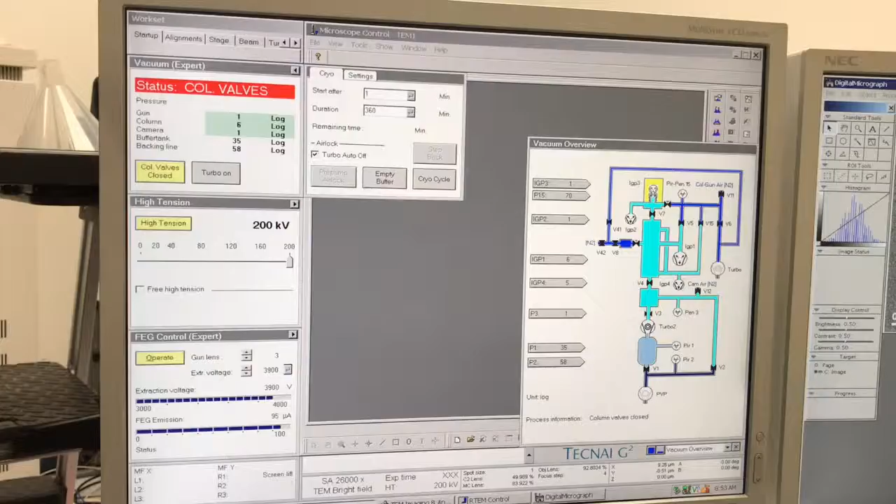So I wanted to make a video specifically covering alignment of the gun. If you've watched the video I did on basic operation of the instrument, I talked about how as part of starting the session you can apply gun alignments that have already been saved.

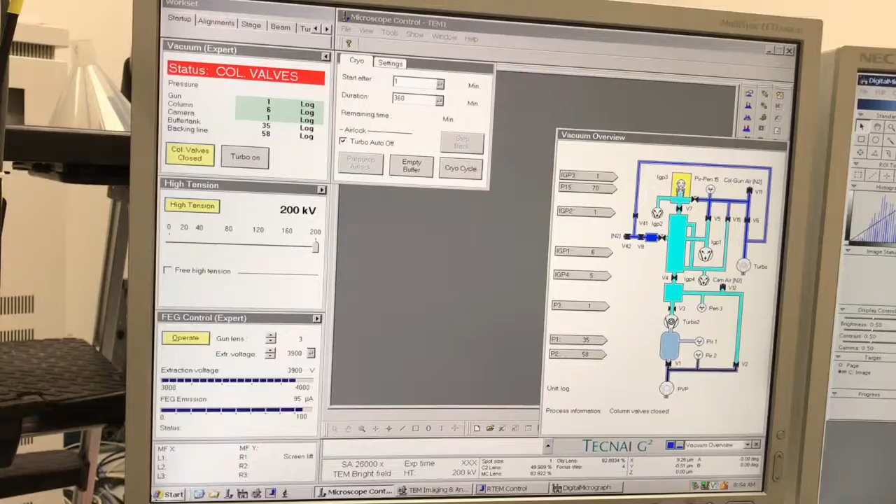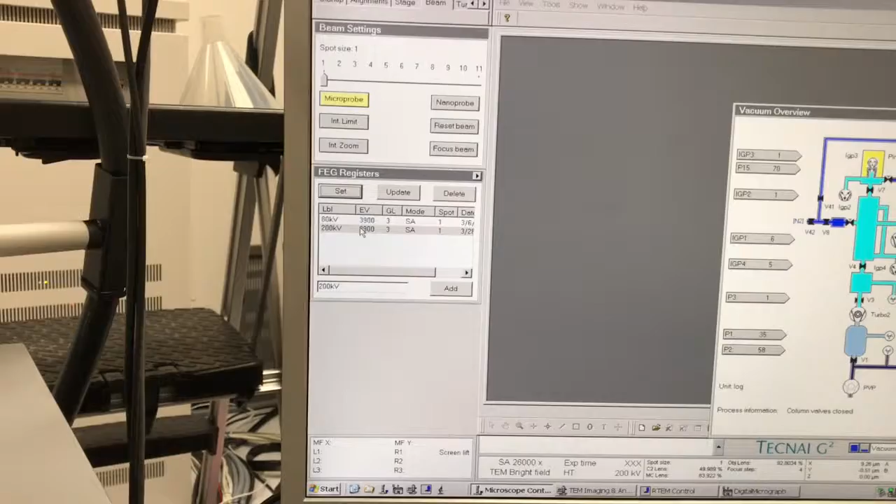So if you recall, come up here, go to the beam tab. Down here in FEG registers, you can apply gun alignments that have been saved. And I didn't really go over what exactly is entailed in doing the alignments. Okay, so I'm going to go over that as well as how to save them so that they can be recalled later.

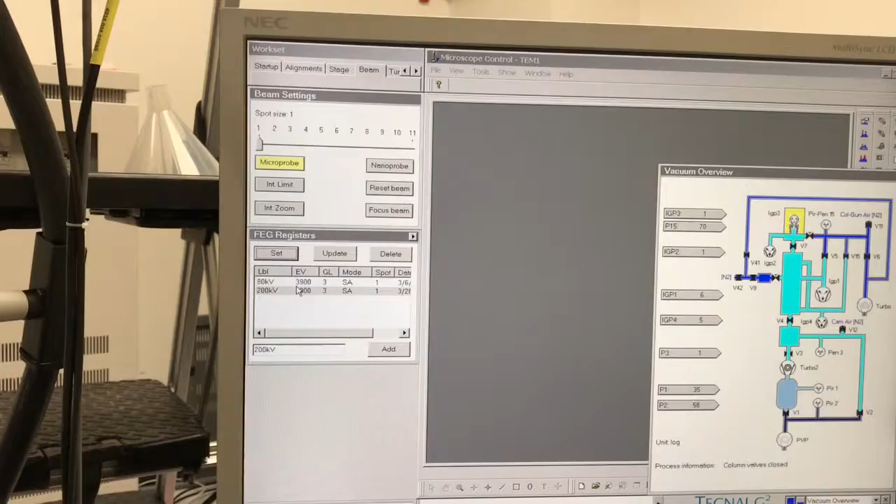So it's been my experience with the Tecnai instruments that the gun alignments are very stable and don't usually need to be done very frequently. It's usually once every 1 or 2 months I will check them to make sure that they look okay, and usually they don't need much adjusting if at all, and then I will just update the alignment and save it, so then any user who comes in can just apply the alignment and doesn't have to worry about doing the gun alignment manually.

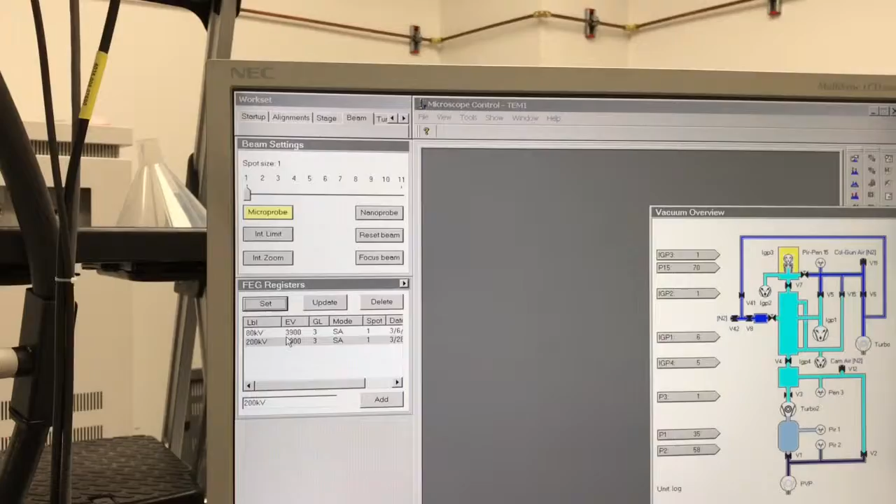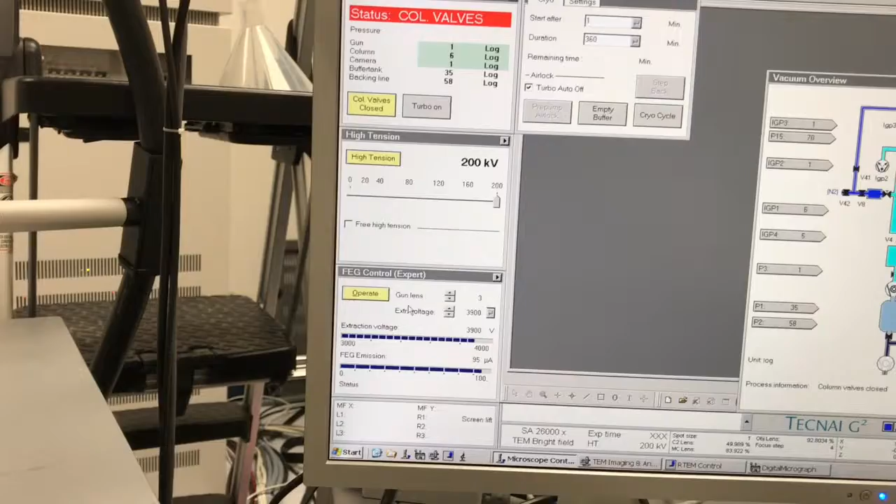So if we come back to the startup tab right here, okay, down here in high tension and FEG control, there's two really important parameters. Actually, I should say maybe three. One obviously is the high tension or the voltage, and then in FEG control there's what's called the gun lens and the extractor voltage. So your gun alignment is going to depend on all three of these parameters.

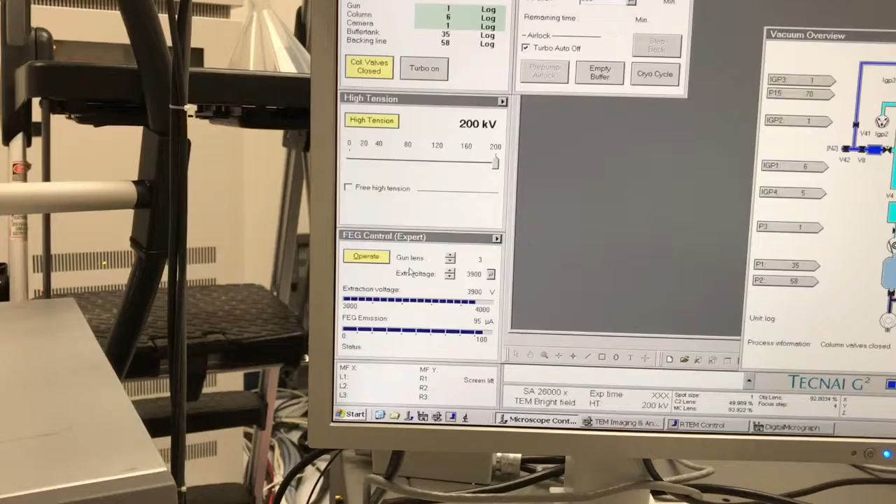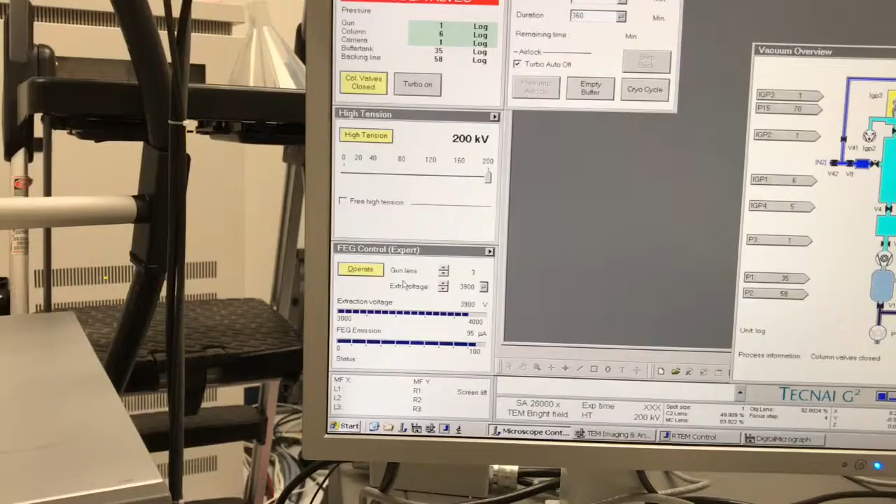Generally speaking, when you're operating the instrument, you're going to be running your extractor voltage at basically a preset value, irrespective of the high tension or the gun lens. Not to say that you couldn't necessarily alter that somewhat, but generally speaking, that value is kind of preset for operation at any voltage or gun lens. What you have more control over as a user are the high tension and the gun lens.

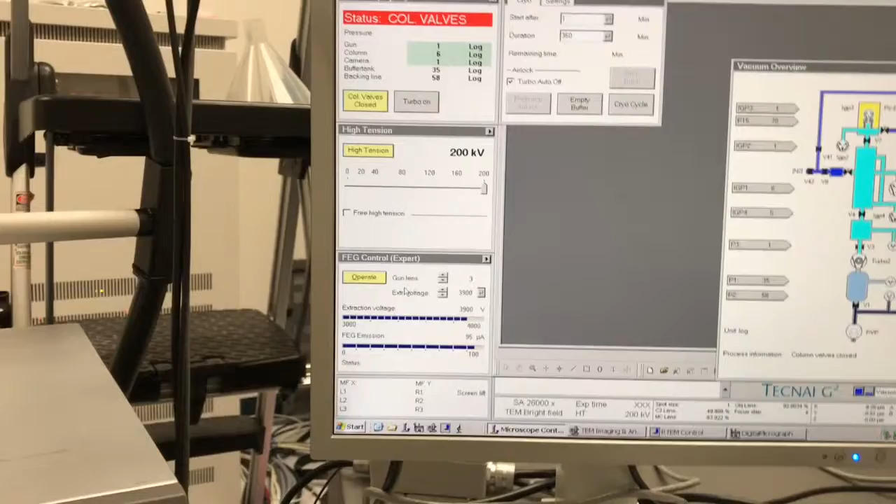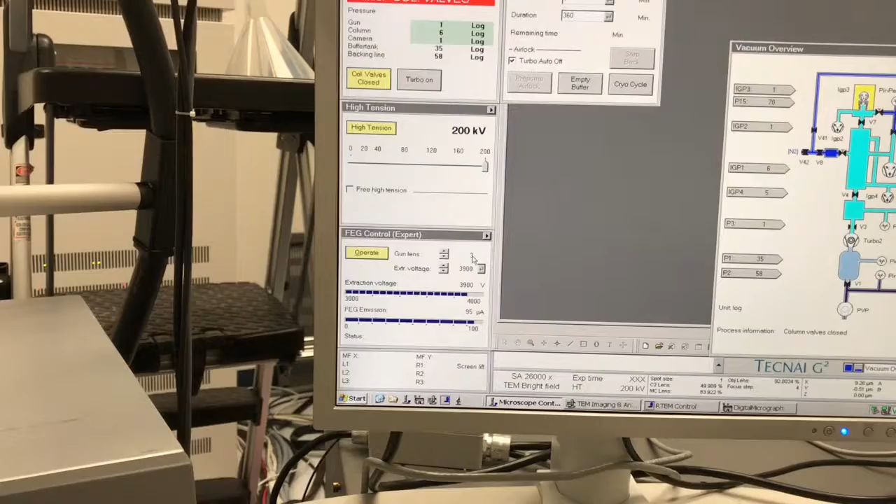So the high tension, obviously, that's the voltage that's applied to the electrons, the accelerating voltage. The gun lens, however, is something different. So that's actually a lens in the gun that provides a focusing action. And that has numerical values. I think this goes from like 1 to, I'm not sure what the upper number is. It might be like 7 or 8, I'm not sure.

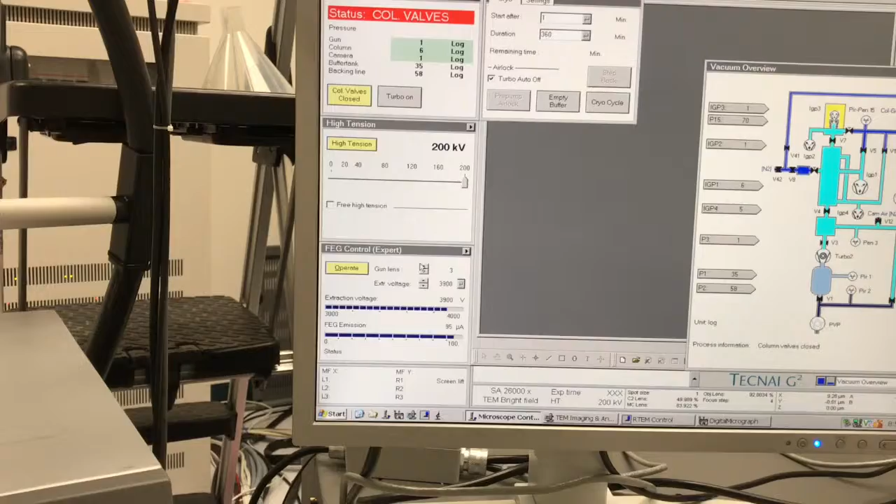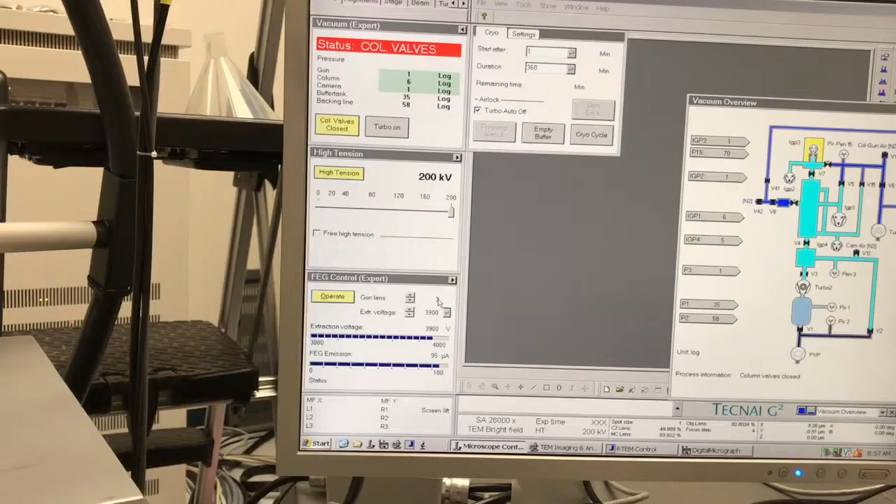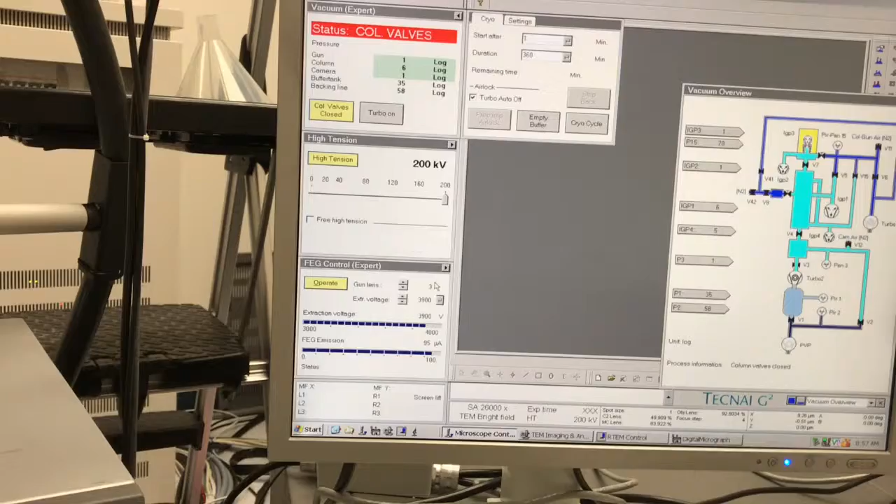The basic idea though behind the gun lens is if I go lower in numerical value, I end up with a smaller demagnification of the gun. And concomitantly, I end up with more current in the beam reaching the sample. So it's very much analogous. The gun lens is analogous to numerical spot size. If I increase this value, I get more demagnification of the gun, which in principle means I can get a smaller beam size on the sample, but I end up with less current in the beam reaching the sample.

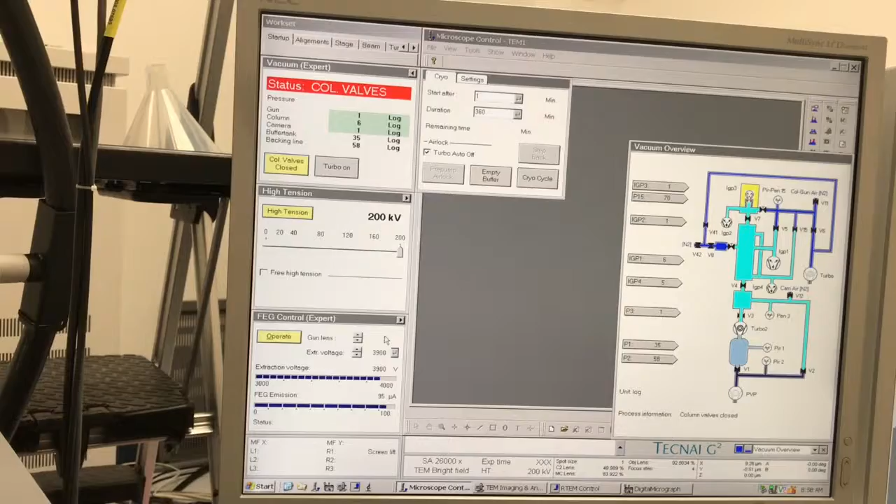What's interesting about this though is I have not personally, at least on this instrument, seen a huge difference in changing the gun lens value up from this and getting a smaller probe size. I do see the change in beam current, but I haven't empirically observed a noticeable difference in the smallest possible beam size as a result of changing the gun lens.

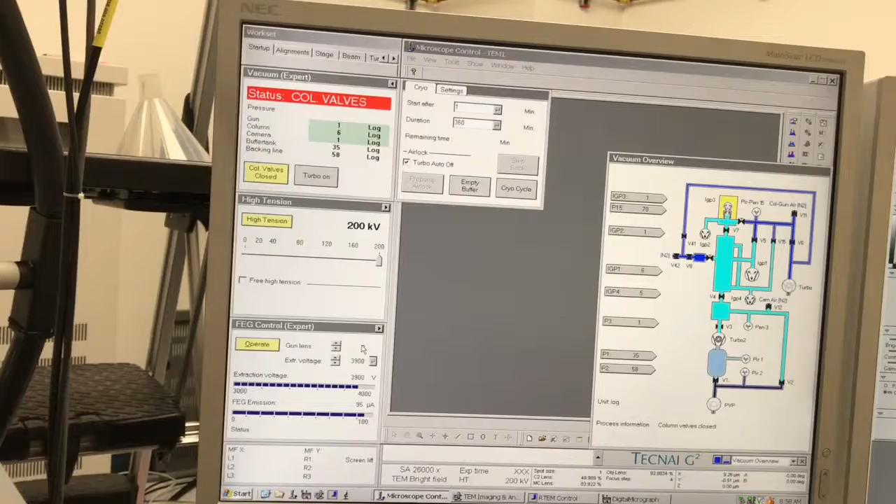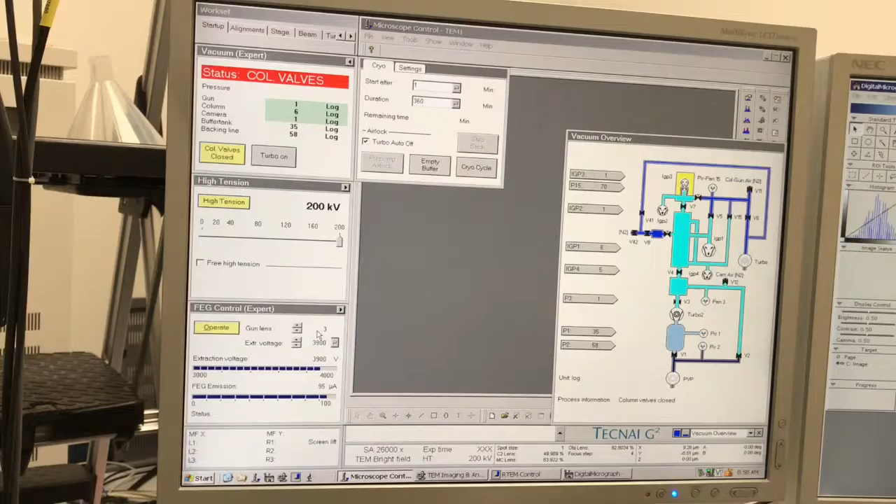So if you're not really getting a benefit in terms of smaller probe size, like if you were doing, say, atomic res STEM, by going to a higher gun lens and you're losing current, there's really very little reason to use a higher value of gun lens than is necessary. Gun lens 3 is what's recommended by the manufacturer just for general operation. So that's what I leave it at.

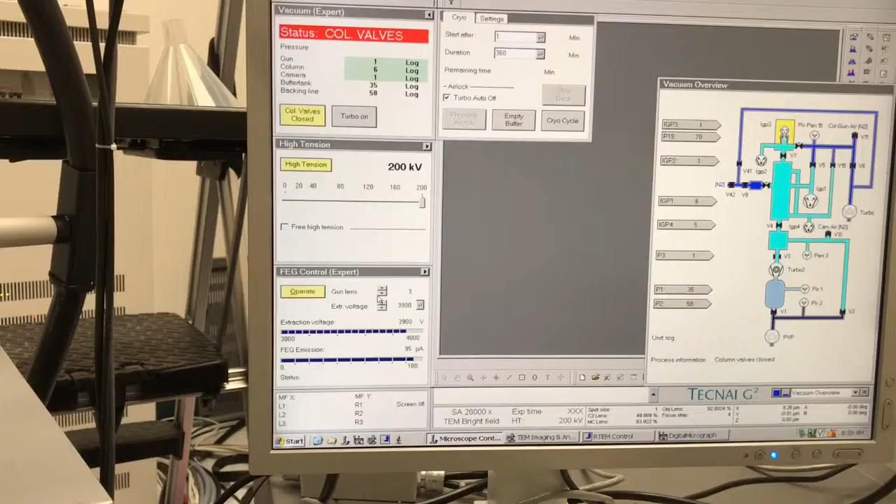But anyway, the takeaway here is your gun alignment will depend on what is your high tension and what is your gun lens. So for general operation, we use 200 kilovolts and we use gun lens 3. We do have an alignment set up for 80 kilovolts, which I'll show you later, if this was being used at a different voltage. So that's the first thing you need to know about doing the gun alignment.

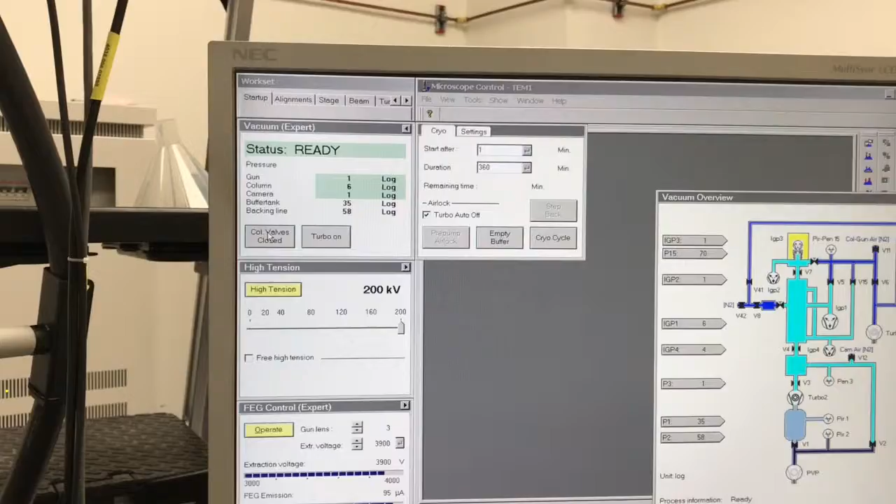Okay, so the actual gun alignment then. I'm in startup here and I've opened up the column valves. So if we come to the screen here, you can see that I've got a beam. I don't have a sample in right now. That's ideal for when you're doing this. You don't have anything blocking the beam.

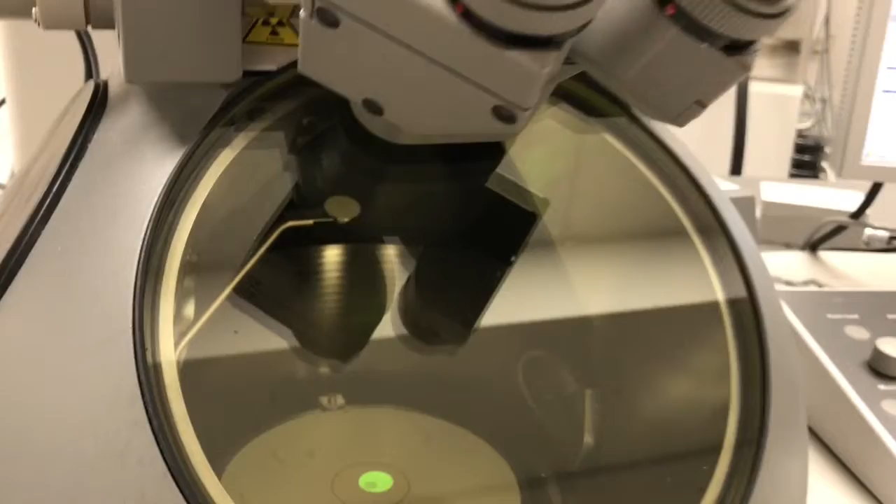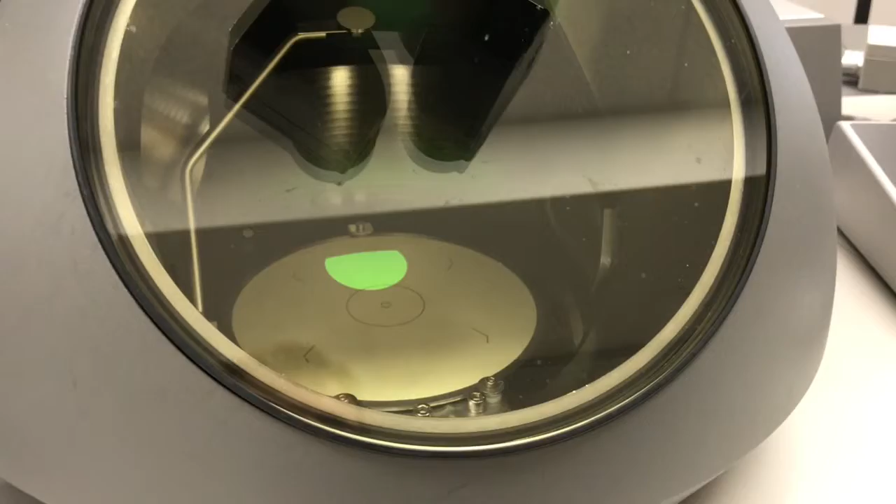So first thing we need to do is change our C2 aperture. So for general operation, this is set here at number 2. I'm going to increase this to 4. Okay, and now the first thing I have to do is realign the C2 aperture. So I'm in SA mode. You can see here you want to be in SA mode when you're doing this.

Okay, and if you recall the procedure, go to crossover, expand clockwise, come back up here, adjust your aperture shifting screws here to recenter the beam. And we'll do a couple iterations of this. Okay, I have a little bit bigger than that 4mm circle, expand it. That actually looks pretty good right there, so I'm not going to do another iteration. Okay, so that is the first part of this.

I'm also at spot size 1. I like to do this at spot size 1 just because, generally speaking, that's what you're using when you're doing most conventional imaging. Although the gun alignment shouldn't matter, it makes it easier to do if you're using spot size 1 because you have the most current possible reaching the specimen.

Okay, so I increased my effective magnification substantially, or my indicated I should say. I'm still in SA mode, but I'm up to 175,000x. Okay, and what I want you to watch here, so I'm adjusting the C2 control, and you notice the beam isn't perfectly centered. There's a reason for that. This is going to be easier for you to see. As I go to crossover, close to it, you see inside the beam there's a bright spot.

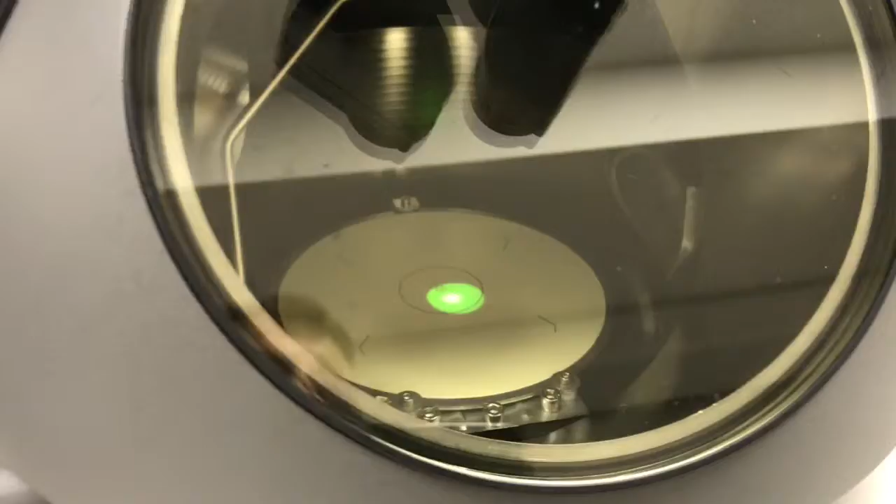Come to the Tune tab, click on Gun Tilt. Okay, your multifunction knobs are now activated for gun tilt. With the gun tilt, I find that you want to bottom out the sensitivity with these because it is very sensitive otherwise. Okay, and now it's literally, you're adjusting to get that bright spot centered inside of that illuminated area. Okay, so actually that looks a little bit better.

If I throw it off, okay, so now I'm not centered anymore. You notice the beam is kind of moving around a little bit. That's not really problematic. If you need to shift it back, use the trackball, obviously. I'm only adjusting the X multifunction, so I can go ahead and try the Y here. Alright, so you can see that's a little bit off. You may need to periodically, yeah, so that's off there. But just adjust your C2 control.

Alright, so that's actually pretty good right there. Again, it's a little hard to see. I would normally do this with it centered, but if I shift it off so it's not over the circle, it's easier for you to see on the camera. Whoops. And so that's off. Okay, that looks pretty good right there. Okay, I've got that bright spot centered. So I really didn't have to make a whole lot of adjustment to this, but I did make a little bit of one.

The other thing that may happen when you're doing this is you may have to adjust your condenser stigmators. So the condenser astigmatism isn't really off by a whole lot, but again, if I wanted to adjust that, I'll go ahead and hit done here. I'm in the Tune tab, select condenser, and my multi-function knobs are now activated for that. Okay, and so actually, when you have the number 4 aperture in, your beam is not going to be perfectly circular, even when you have your astigmatism of the condensers corrected. It's going to actually kind of have a little bit of a triangle appearance, which is normal.

Okay, so that's actually normal right there, and now it's not. Again, the litmus test is it has to look symmetrical when you go back and forth through crossover. Does it expand with the same shape? So it's still probably a little bit off. But not too much. Okay. So that's the first part of this, is the gun tilt. And the next thing we're going to talk about is the other part of the gun alignment, which is the gun shift.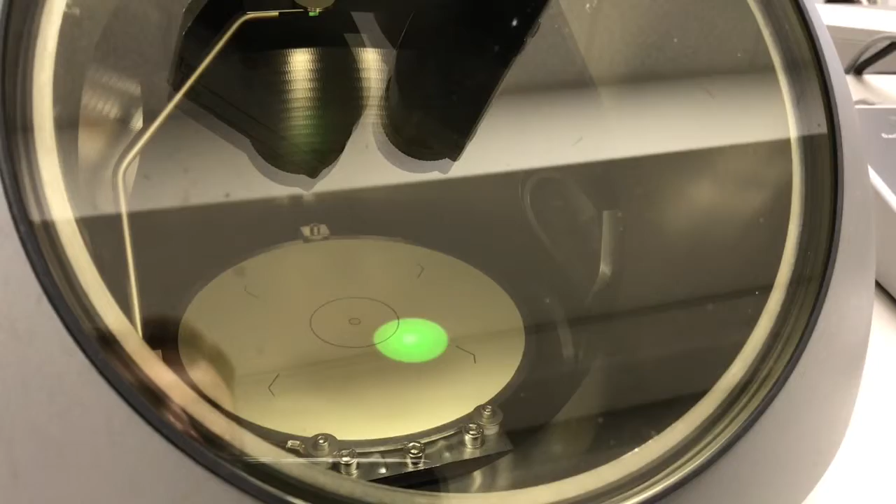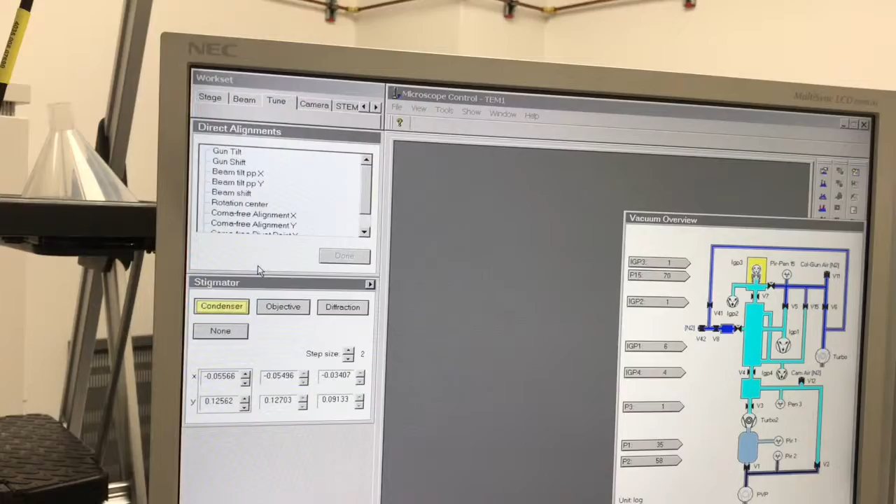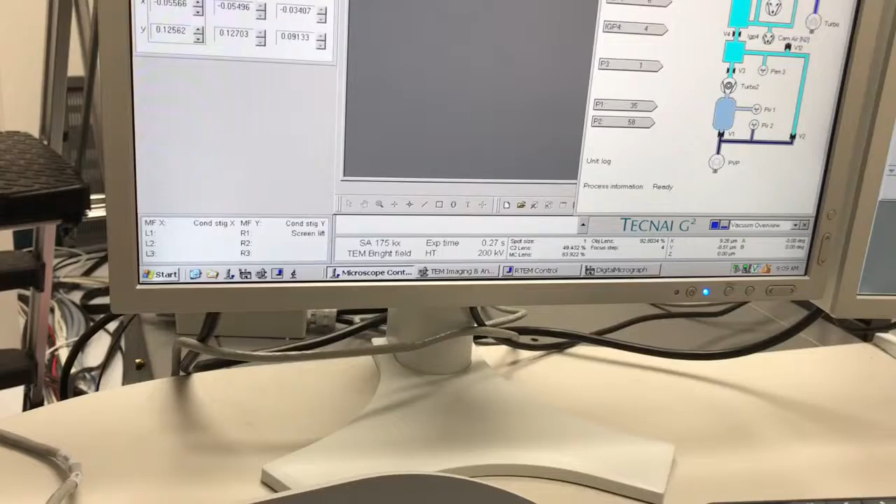Okay, I didn't mention it in the previous segment, but when I click done here in direct alignments, it did save the alignment I made to the gun tilt. Whenever you hit done or you activate another alignment, it will save the alignment that you were just working on, so you don't need to worry about that. So now the gun shift, you don't need to be at high effective magnification for this, and in fact, if you're at very high indicated magnification, then this actually becomes more difficult to do. So I'm going to drop this down. I'm only going to go to like 13,500 for this. You want to be in SA mode, but it doesn't need to be that high.

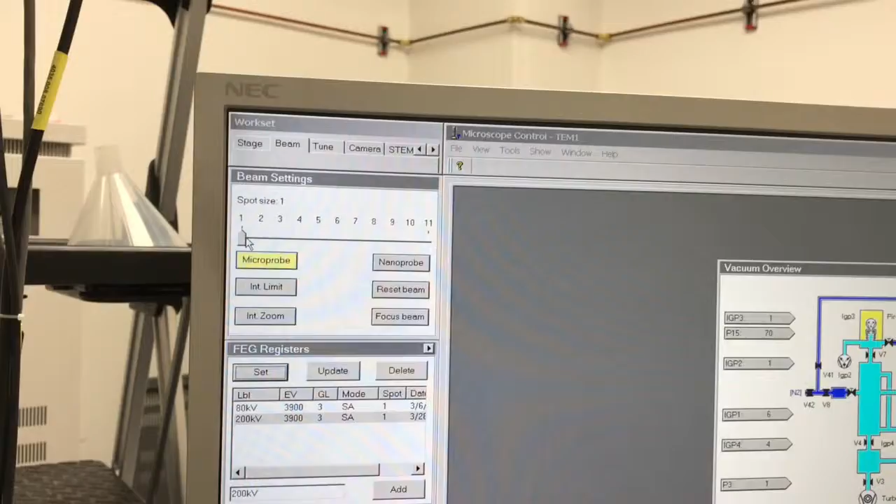Okay, go to crossover, center the beam with the trackball. Okay, and now I'm going to come back to my beam tab where I set the numerical value of spot size, and I'm going to go up in numerical value. You want to go to a higher number, obviously. I'll usually go to like 6 or 7, somewhere in the middle here. So we'll go to 6. And you can see I've lost current, which is expected because I went to a higher numerical value. And now I'm going to go back to crossover.

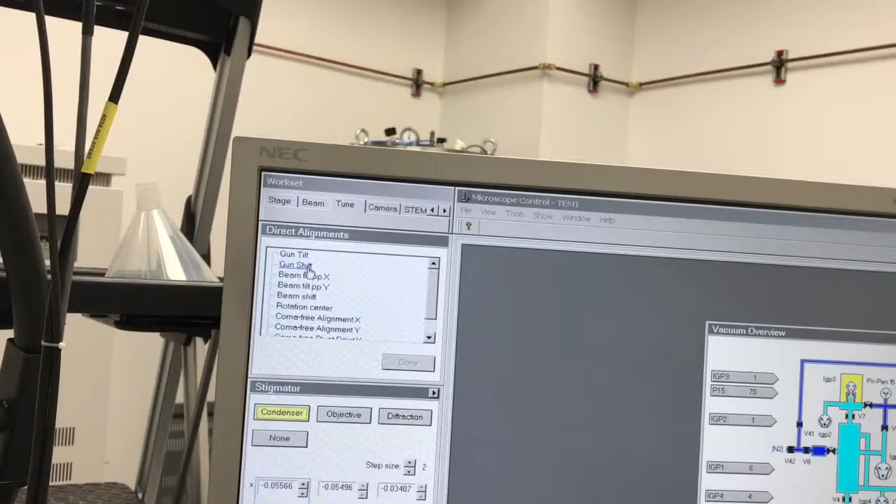Okay, and now you'll notice my beam isn't centered anymore. So I want to center it now using the trackball. The trackball, again, is the dedicated condenser deflector shift function. So use the trackball, center it. Now I'm going to come back to beam settings, go back to 1, go back to crossover, and now you see it's not centered anymore either. Okay, so now this is where the gun shift comes in. I'm going to go back to the Tune tab, activate gun shift. And now again, my multifunction knobs are activated for that.

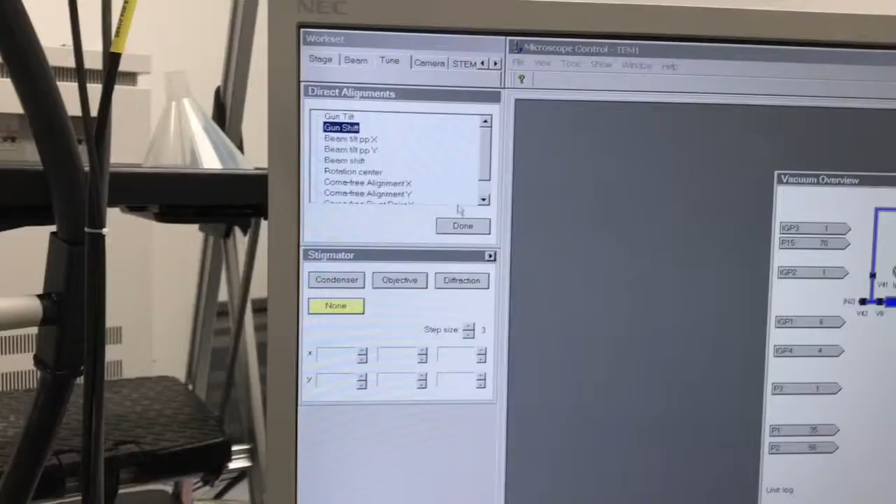I'm going to bottom out the sensitivity, and now I'm going to use my multifunction knobs to center the beam. This is very sensitive even at its least sensitive value, which is why I bottom it all the way out. Okay, and so now I want to do a couple more iterations of this. So I'll select done, go back to spot size 6, bring the beam back to crossover, center it with the trackball, go back to spot size 1, go back to crossover, and you can see it's basically centered. If you're doing this properly, it should get a little bit closer each time. If you're not getting closer each time, you probably have something mixed up.

You're activating gun shift when you should be using the trackball, or you're activating the trackball when you should be using gun shift. Again, what you want to do is switch from the high numerical spot size to the lower value, and then you want to recenter it with gun shift.

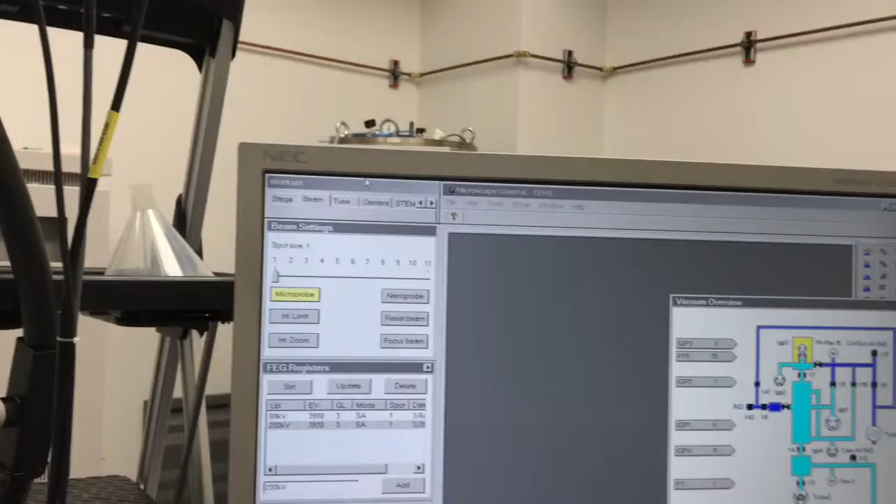Okay, so I'm going to come back to the Tune tab, and again, activate gun shift, bottom out the sensitivity, and I'll make a little bit of adjustment here, although I don't really need to make any because it's basically perfect. Okay, so usually 2 or 3 iterations of this is as much as you need for the gun shift.

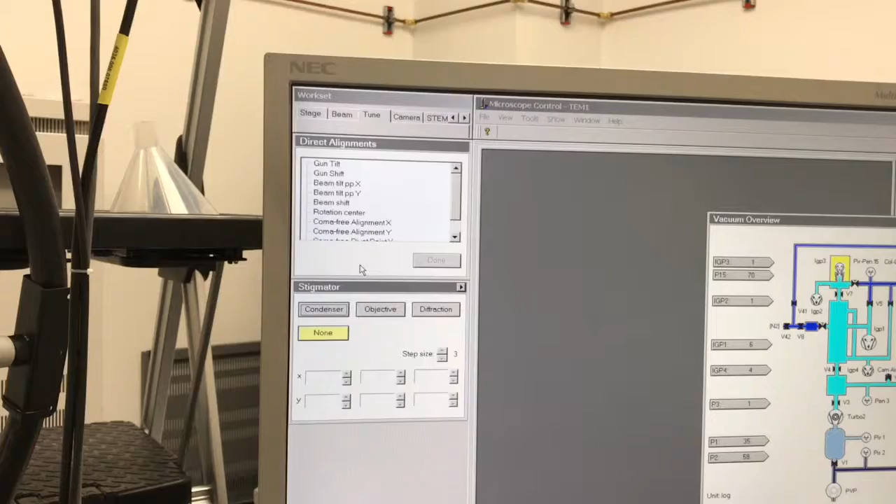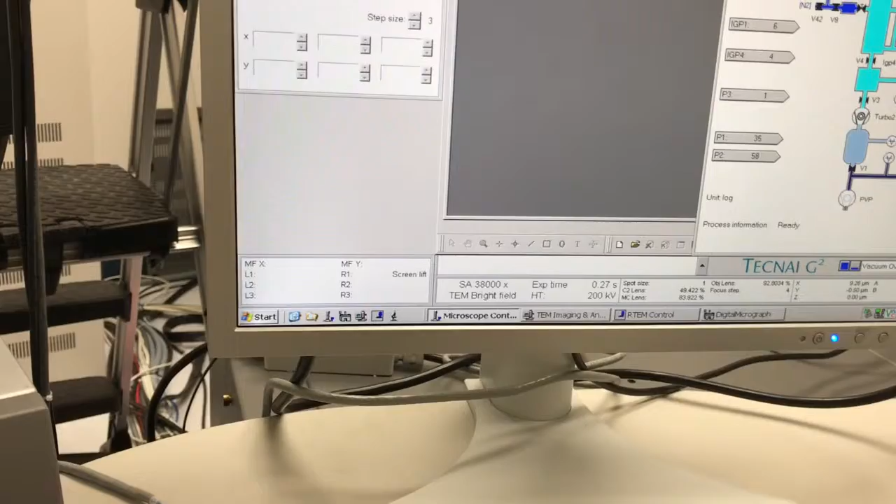Okay, so the last part of the alignment is we're going to go back to a high indicated mag, and we're just going to check to make sure that that bright spot is centered inside the illumination area. If it's not, we need to just make another small adjustment to the gun tilt. So I'm going to increase my indicated mag back up to 175 kx.

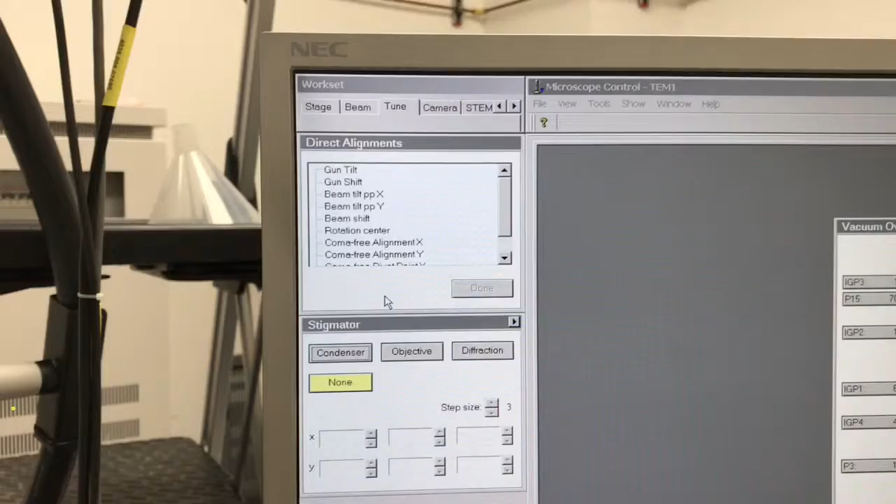Okay, my beam is a little off-centered, but that's fine because that makes it easier for you to see on the camera. And if I expand clockwise from crossover, I'm looking to see, is that bright spot centered inside the illuminated area? And it is. So if it wasn't, I'd go back to direct alignments, activate gun tilt, and I'd make another adjustment to the gun tilt.

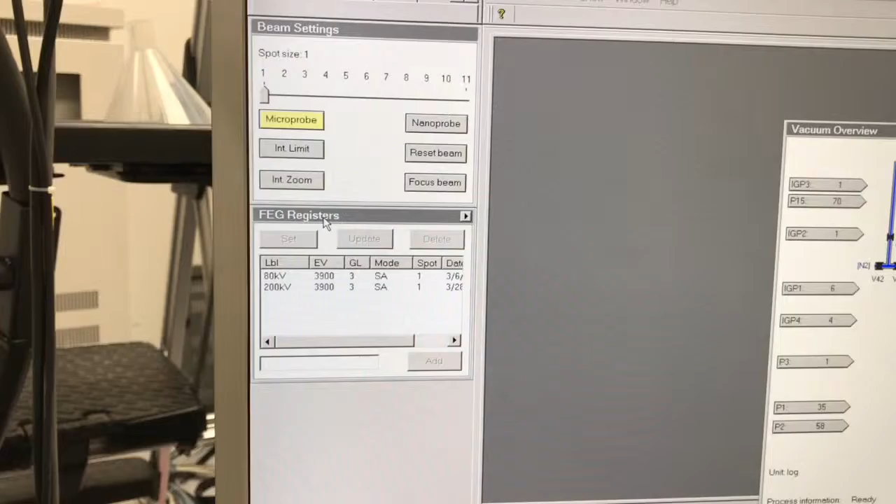You may need to do that if you make a large adjustment to the gun shift, but we really didn't make a big adjustment to the gun shift, so it makes sense that we wouldn't have to do another adjustment to the gun tilt. So the gun alignment is done now, and now we can talk about how to save the gun alignment. So if I come back to the beam tab here, whoops, and I go down to FEG registers. Okay, this is where I can save a gun alignment.

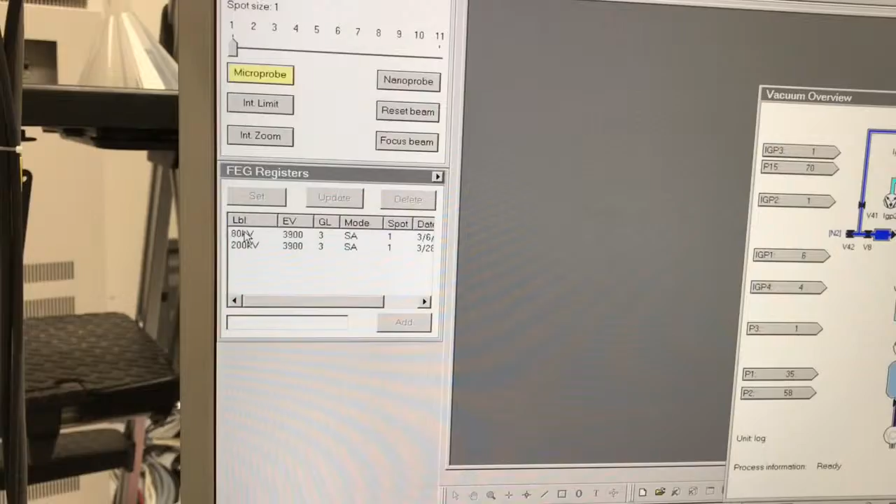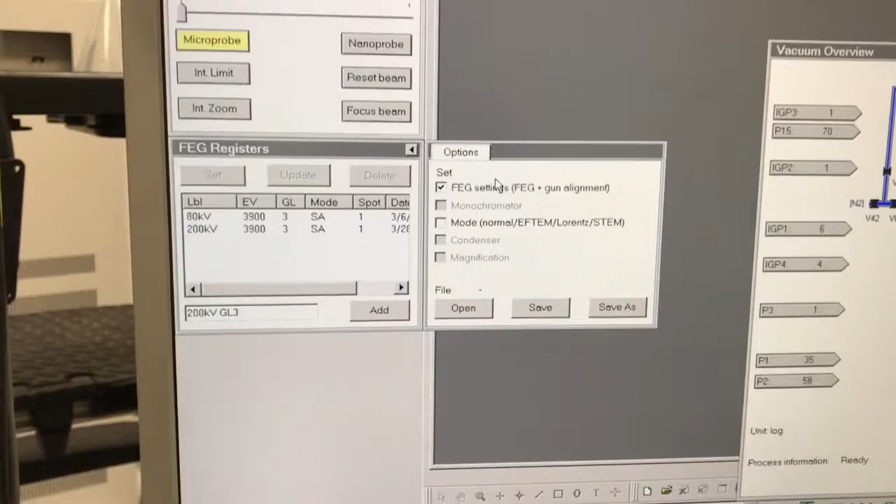Okay, so again, remember your gun alignment depends on your voltage, your gun lens, and the extractor voltage, although usually we run that at a constant value. So I've already got a couple saved in here, but I'm gonna add another one to show you how to add it. So I'll just type in 200 kV space GL3, and then if I expand this flap out here, you can see I have a few options here.

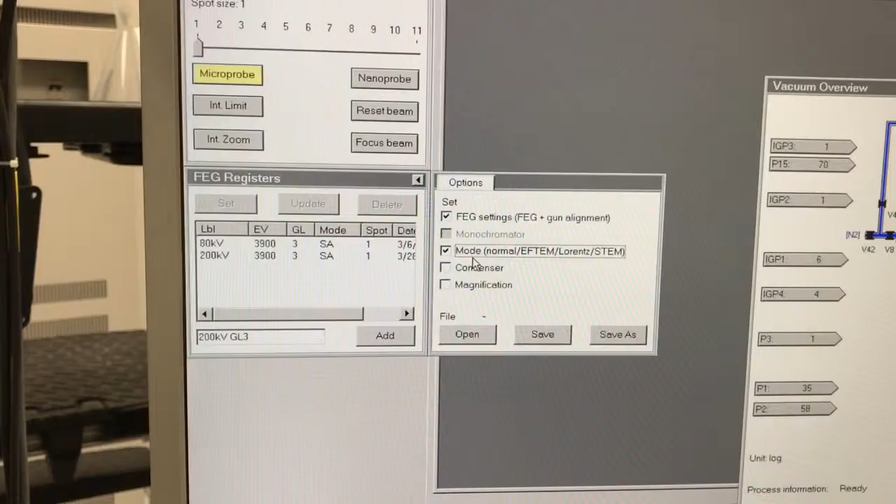Okay, so the way I set this is that I just save the gun settings. What you can do if you choose, and I don't normally do this because I don't find it particularly useful, you can also save the mode of operation that you're in, the settings for your condenser, meaning what spot size you're at, what was the value of your C2 lens, so on and so forth, what was your indicated magnification, and that's all saved in the register. What I normally do though is I just save the gun settings here. Okay, so I just check that and I click save.

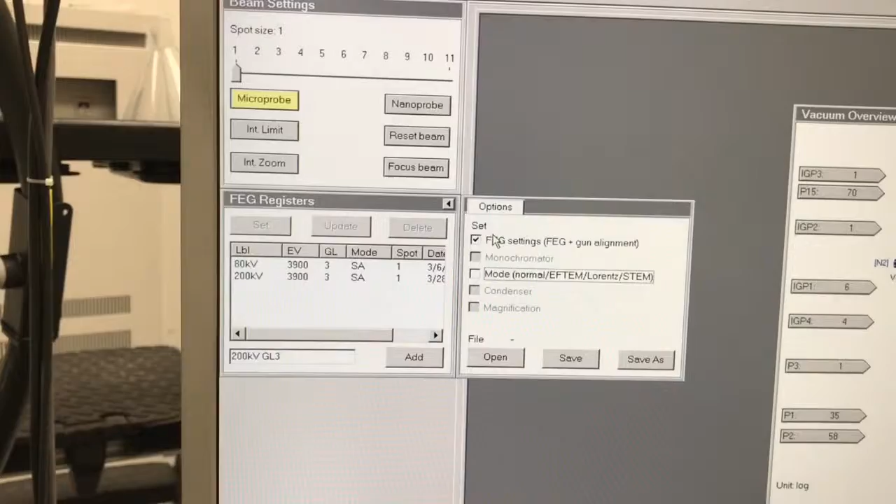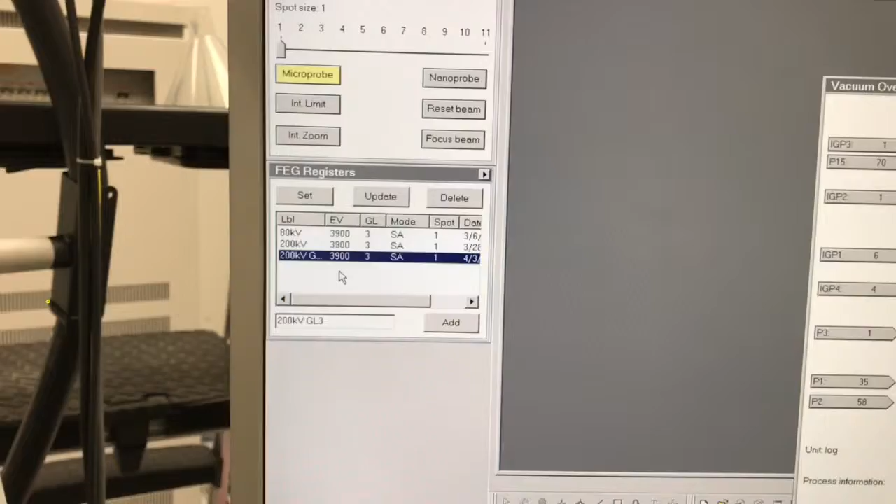Whoops, sorry. I actually just check that here. I go back and I select add. And so this adds this to the FEG registers. So now when I come back to the microscope and I'm starting the session, all I have to do to apply the gun alignment is just select the label and select set, and that applies the gun alignment.

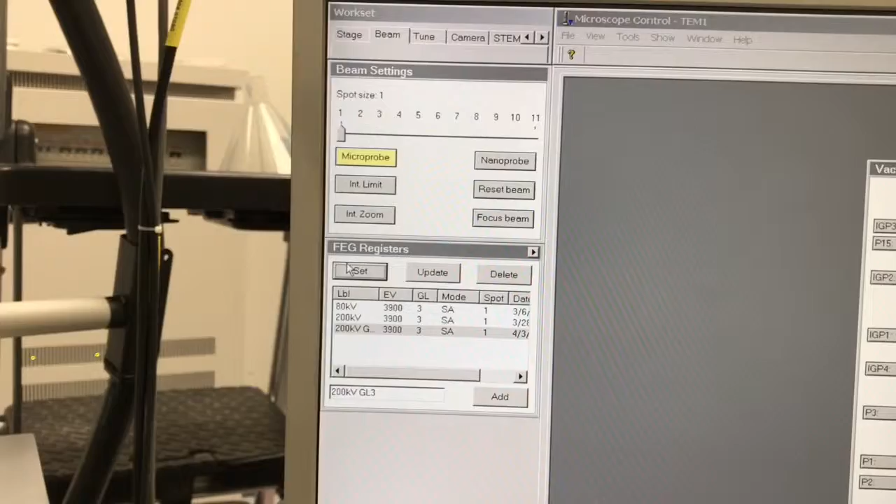And again, my experience with the Tecnais is that the gun alignments are very stable. They usually only need to be checked once every couple of months, and unless something really traumatic happens to the microscope, the gun alignment is usually very steady and doesn't need a whole lot of adjustment. And so a user can come in, just select the appropriate register for whatever voltage he or she is working at. We have one for 80 kilovolts as well. You just select it and you hit set, and then it applies it. Okay?

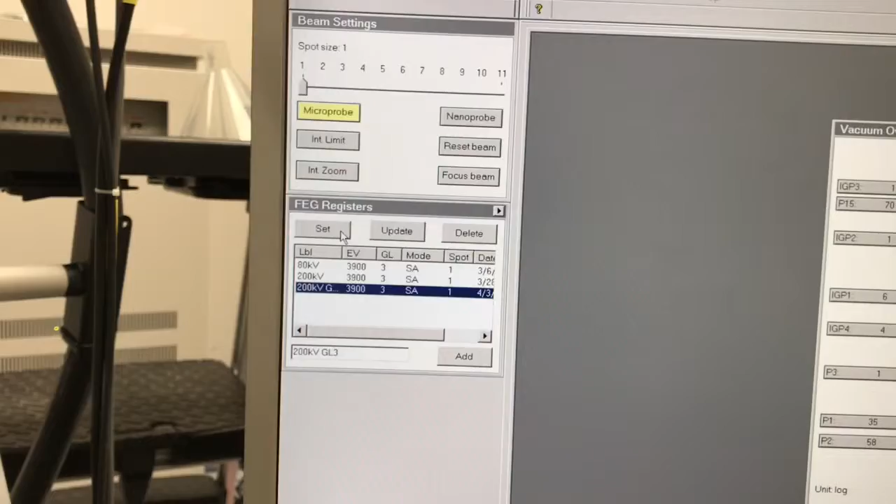And so this concludes the demonstration on how to perform the gun alignment.